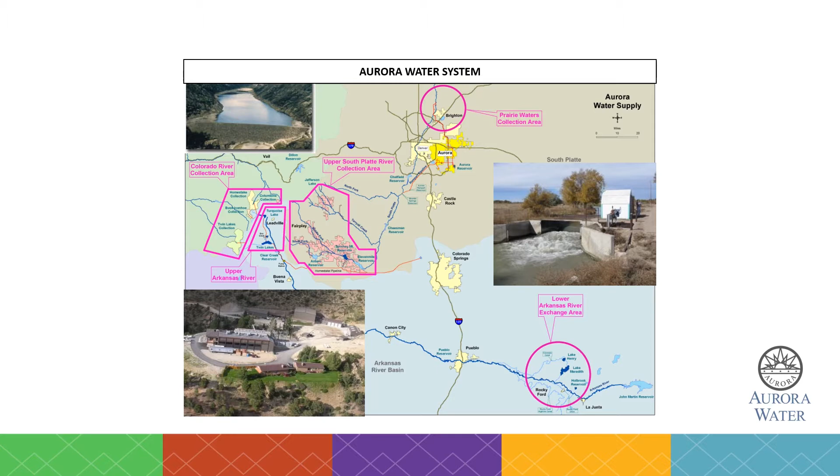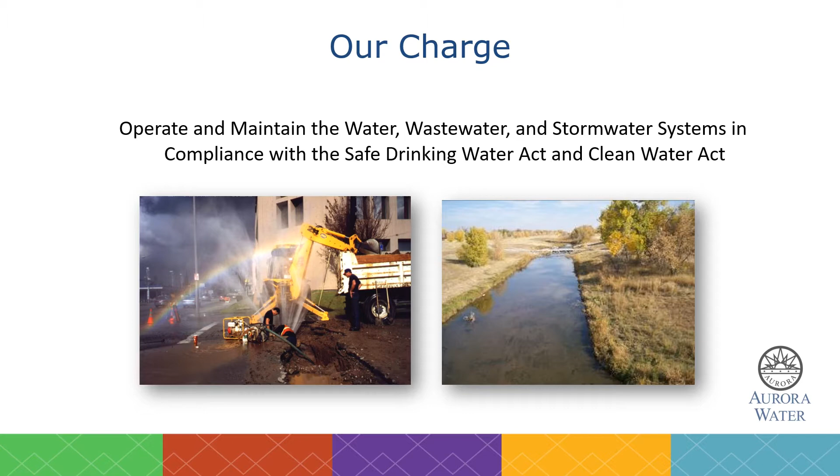So what is our charge? Aurora Water consists of water, wastewater, and stormwater systems, and we must maintain compliance with all state and federal regulatory guidelines for not only drinking water, but for wastewater and stormwater systems. Specifically, we must maintain compliance with the Safe Drinking Water Act and the Clean Water Act.

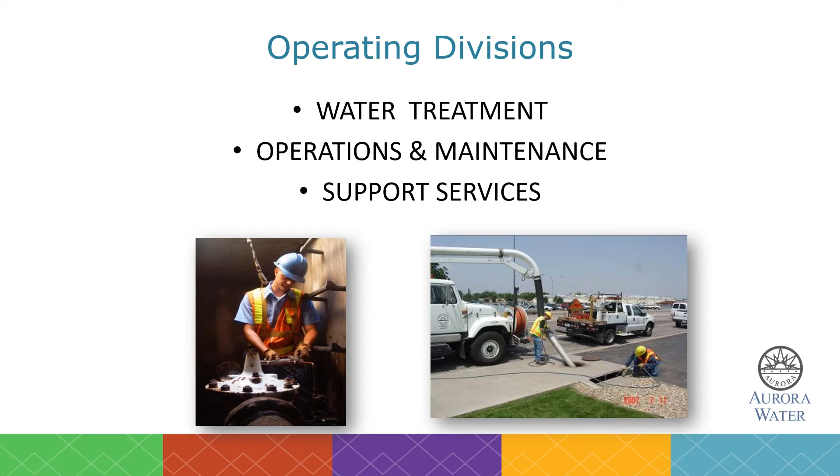Today, you'll be hearing from our 3 operations managers. The first up will be Bobby Aligo, who's the manager of water treatment, followed by Mike Mills, who's the manager of operations and maintenance, and lastly, Marina Lurch, who's the manager of support services.

Thank you, Mr. Sieben, and welcome everyone. My name is Bobby Aligo. I'm the manager of Aurora's Water Treatment Division. Water treatment has 2 sections: source of supply and water treatment.

Source of supply is made up of 4 groups. The first group is Spinney Mountain Operations, located in South Park, Colorado. The next group is North Campus Operations, which is part of the Prairie Waters Project and located in the area of Brighton, Colorado. The third group in source of supply is Reservoir Management, located here in Aurora. And the fourth group is Dam Safety, also located in Aurora.

Source of supply groups operate and maintain the city's raw water supply system, which is a network of reservoirs, streams, ditches, conveyance pipelines, and the water treatment facility at Front Range Airport, which is now known as Spaceport. I will share with you on the following slide more information on the city's raw water supply system.

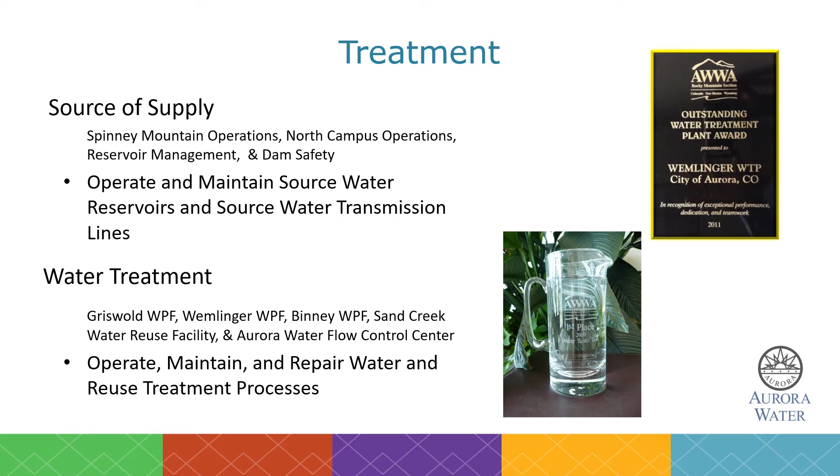Well water is pumped 34 miles to Binney Water Purification Facility through 3 pumping stations that pump water a total height of about 1,000 feet.

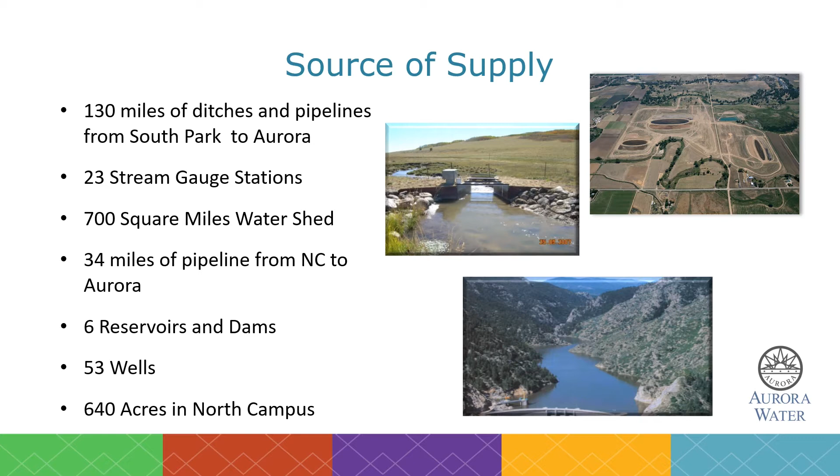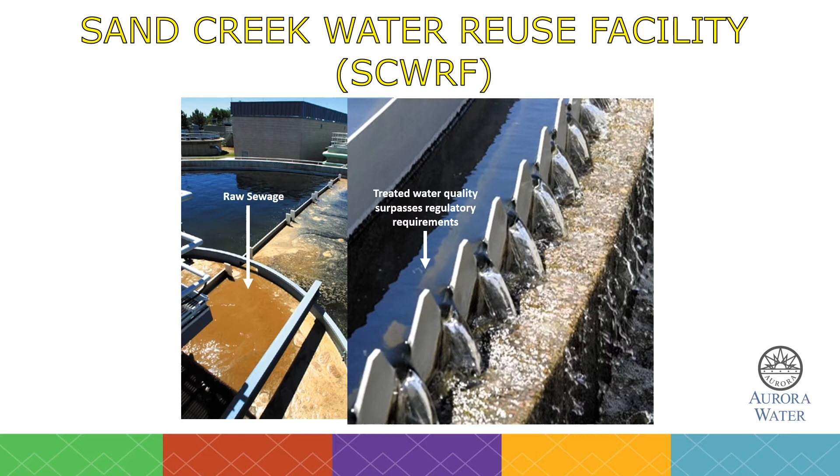Sand Creek Water Reuse Facility was placed in service in 1968 as one of Colorado's first reuse treatment facilities. The treatment plant has the capacity to produce up to 5 million gallons per day of treated water, which is pumped to Aurora's golf courses, parks, and green belts.

Sand Creek Water Reuse Facility was awarded the National Association of Clean Water Agencies Platinum Award for producing exceptional treated effluent and not having any water quality violations. Treatment plant operators and maintenance staff at Sand Creek Water Reuse Facility are responsible for this prestigious recognition.

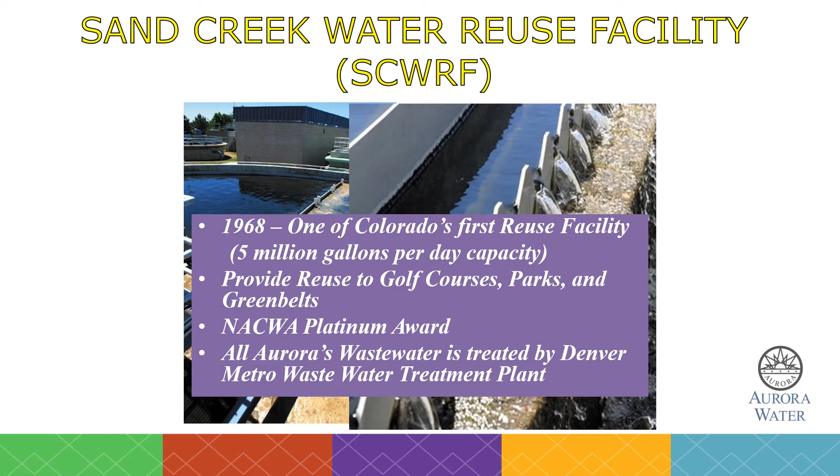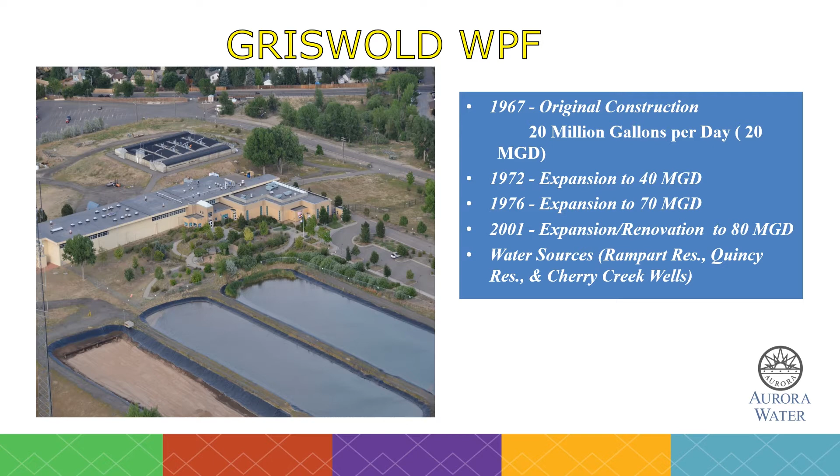Wemlinger Water Purification Facility is named after Charles Wimblinger, who was Aurora's Utilities Director from 1963 to 1968. It was placed in service in 1982 with a treatment capacity of 40 million gallons per day. It has been expanded twice, once in 1987 and most recently in 2002.

Wemlinger has a treatment capacity of 80 million gallons per day, and its primary source of raw water is from Rampart Reservoir and Aurora Reservoir.

Binney Water Purification Facility was completed in 2010 as part of the Prairie Waters System. The Binney facility is named after Peter D. Binney, Director of Aurora Water from 2002 to 2008. Binney Water Purification Facility has a treatment capacity of 50 million gallons per day.

This facility is really two water treatment facilities on one site. It has a conventional treatment train that treats water from Aurora Reservoir, and it has an advanced treatment train that treats water from the South Platte through North Campus. Binney Water Purification Facility treats water from Aurora Reservoir and our Prairie Waters Project North Campus wells.

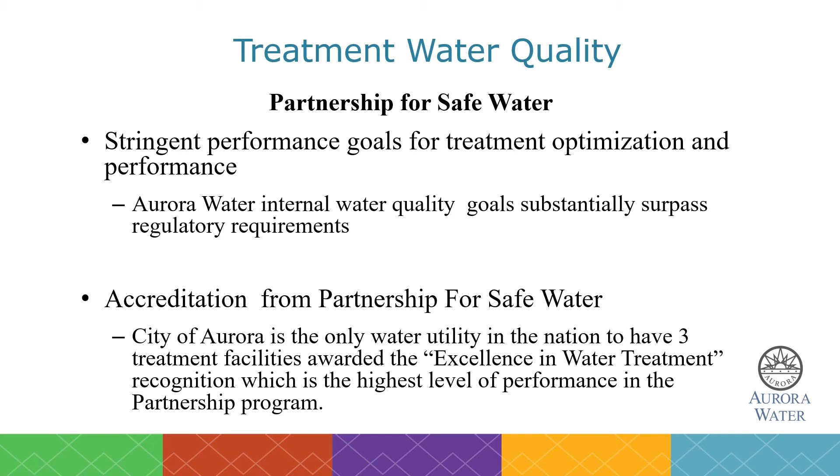As I mentioned earlier, the Aurora Water Flow Control Center is part of the Water Treatment Division. This group coordinates after-hour emergency response. They monitor alarms on SCADA and dispatch the appropriate group. SCADA is an acronym for Supervisory Control and Data Acquisition System. This group monitors Aurora's water system. They operate the water distribution system, operate Sand Creek Water Reuse Facility after hours under the direction of a certified operator, and they receive all after-hour customer calls.

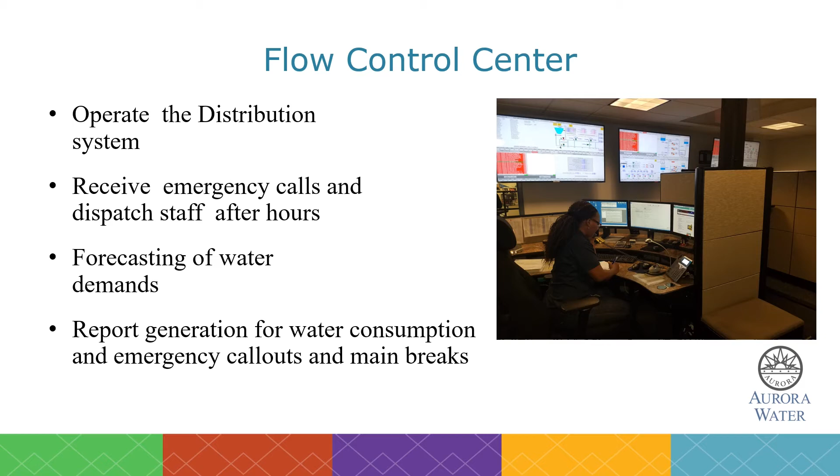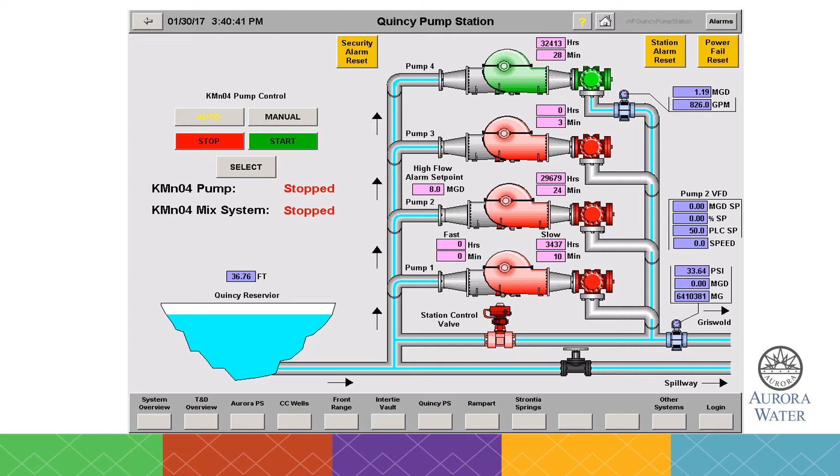Thank you, Bobby, and hello, everyone. My name is Mike Mills. I'm the Manager of Water Operations and Maintenance. Water Operations and Maintenance consists of 4 distinct sections: pumping, water T&D, which stands for water transmission and distribution, wastewater, and stormwater.

Let's talk a little bit about what each section does now. After the finished water has left the treatment facilities, water transmission and distribution and pumping are responsible for conveying that water throughout the distribution system. In water T&D in particular, they are responsible for operation, maintenance, and repair of the pipelines, as well as the appurtenances that are associated, such as hydrants, valves, and pressure regulating devices.

Pumping is also a large part of that. They're responsible for the operation, maintenance, and repair of the pumping stations, which maintain the flow throughout the distribution system, as well as the potable and raw water storage tanks. The pumping section also is responsible for sewer lift stations.

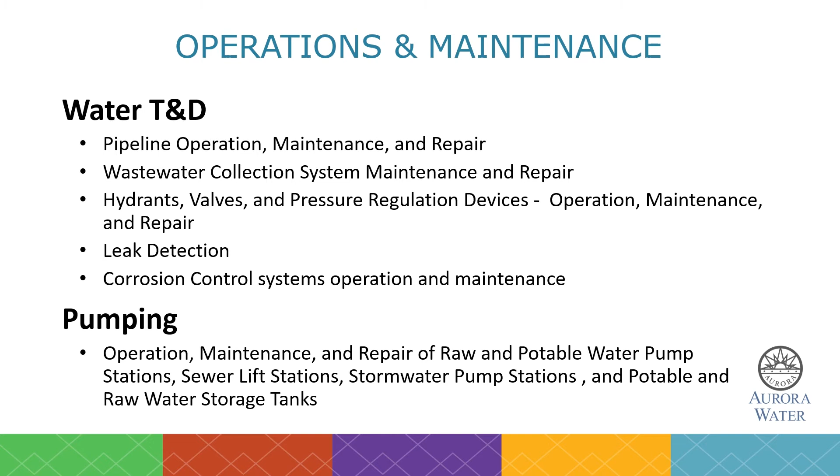The wastewater section is responsible for the operation and maintenance of our city's sanitary sewer collection system. They do this by cleaning and inspecting those pipes on a rotational basis. The stormwater section is responsible for the stormwater conveyance system, including maintenance of the items you see there.

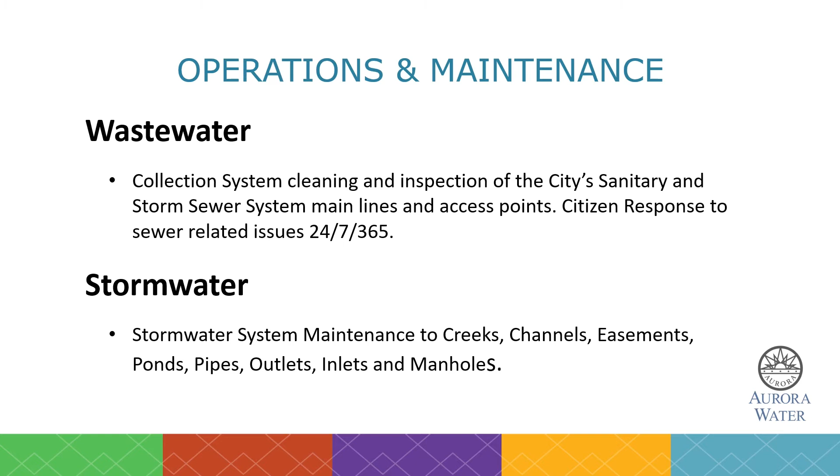Now let's delve into what each group does specifically. If you laid our water pipe end to end, it would stretch from here to Philadelphia, Pennsylvania, to give you some idea of the scale of the system. In it we have over 40,000 valves, which are maintained on a target of every 5 years.

An ISO fire rating is a score provided to fire departments and insurance companies by the Insurance Services Office. This score reflects how prepared a community and area is for fires. It mainly focuses on the local fire departments and water supply. For our portion of it, we maintain each one of our fire hydrants in the system annually to help achieve a high rating.

The pumping area has a multitude of stations that they take care of, including potable water pump stations, which maintain volume and pressures in parts of the city.

We maintain multiple raw water pump stations, including 3 along the Prairie Waters train. We even maintain reuse irrigation pump stations like the one used at the sports park. The pumping group is also responsible for maintaining potable water storage reservoirs, of which there are 9. Additionally, that group maintains 3 raw water storage forebays.

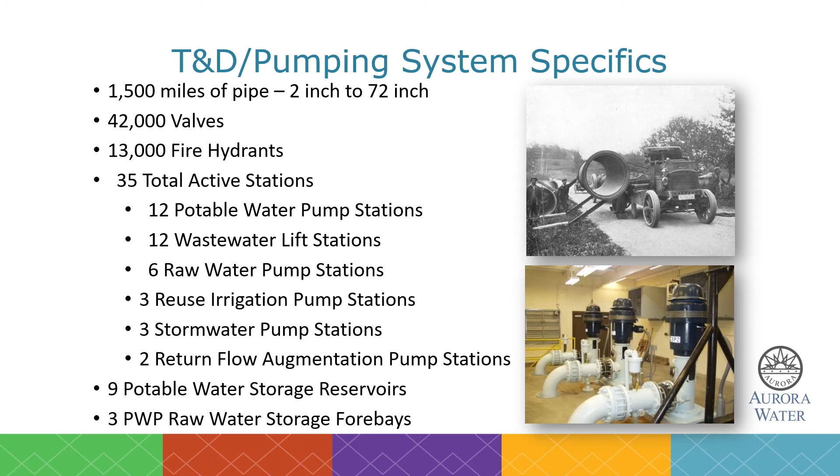In 2007, the Partnership for Safe Water and Water Research Foundation developed a project to help distribution systems optimize operations. It's modeled after the treatment program, and the membership in the distribution program ensures that water quality improvements can be measured and validated over time. Because of the work we've done here at Aurora Water in terms of distribution system optimization, we've been awarded the Phase 3 Distribution Directors Award.

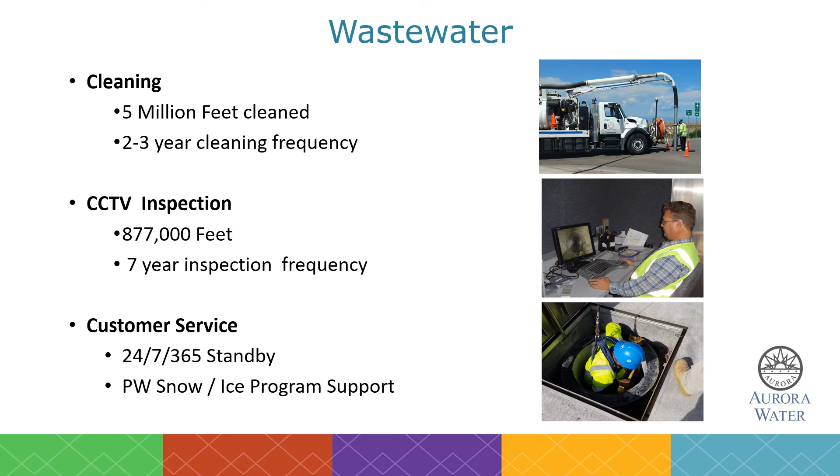And last but not least, this brings us to the stormwater section. The stormwater section is responsible for the cleaning and maintenance of the city's curb inlets, pipes, storm drains, and detention ponds. We maintain 88 miles of stormwater channels and creeks in removing sediment and vegetation from the channels, forebays, and ponds. We perform revegetation associated with channels and ponds. We maintain handrails and other fall protection devices for the public using stormwater facilities.

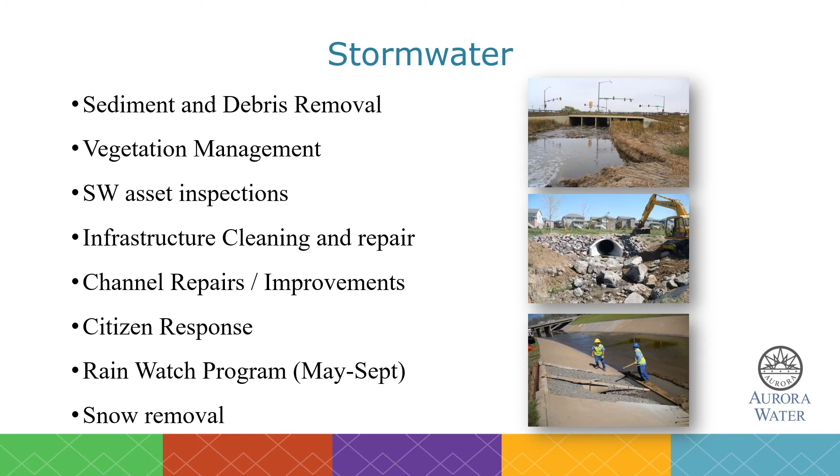We also provide flood response management, and we help out with the city's public works snow removal effort. Due to all of that maintenance work I just mentioned that Aurora performs on the stormwater system, including the fact that we do so in a proactive manner, we are able to be a part of discounting flood insurance rates and pass that on to our citizens.

The Community Rating System, or CRS, is a voluntary incentive program that recognizes and encourages community floodplain management practices that exceed the minimum requirements of the National Flood Insurance Program. Over 1,500 communities participate nationwide, and we're one of them. Now I'd like to toss it over to Marina Lurch, who is the Manager of Support Services.

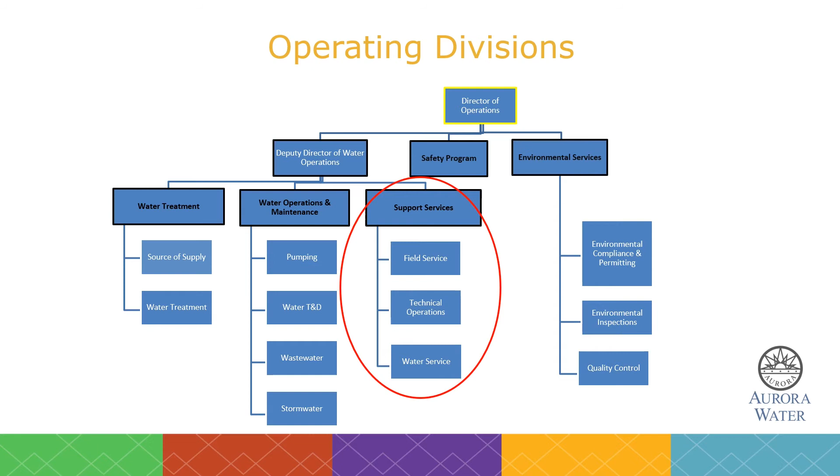Thanks, Mike. My name is Marina Lurch. I am the manager for the Support Services Division, and my area is comprised of 3 sections: Field Service, Technical Operations, and the Water Service section. I'll provide a little bit more detail to each of these 3 sections. Our Field Services team responds and resolves any customer concerns, as well as operate, maintain, and repair our meter reading system. Technical Operations team provides supervisory control and remote operation capabilities to manage Aurora Water's infrastructure.

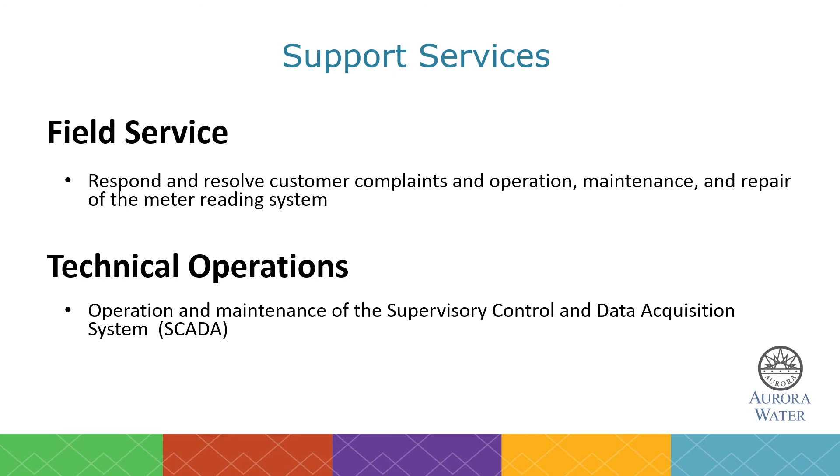And our Water Service team provides cross-connection control program, as well as utility locating for all of our water, wastewater, and stormwater infrastructure. They also test and disinfect new water lines and provide several internal services for Aurora Water. They take care of our fleet control program, as well as small equipment repairs. We also provide a trades team to allow for fixes in the system, and our warehousing and procurement team works on gathering any items necessary for the utilities to perform their work.

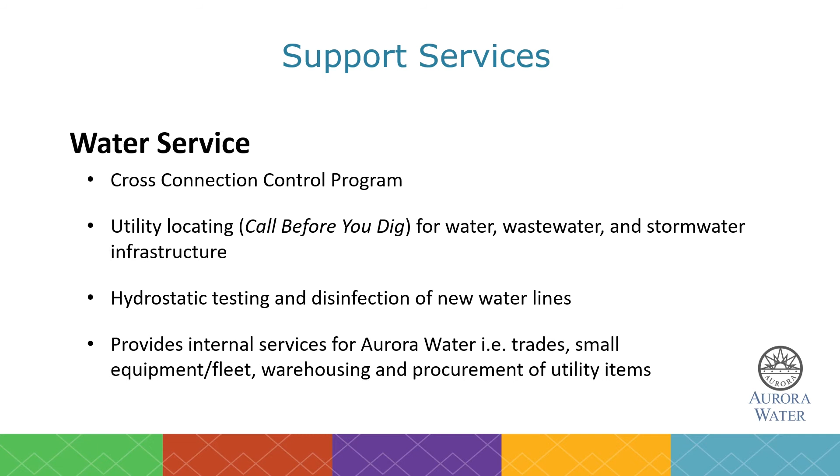Field service consists of 3 sections: meter maintenance, which manages our large meters, meter reading, and data management. Our meter reading and data management is a critical area to ensure accurate and timely billing to the citizens of Aurora. This team consists of meter reading, our Operations Service Center, hydrant meter rental, and data management.

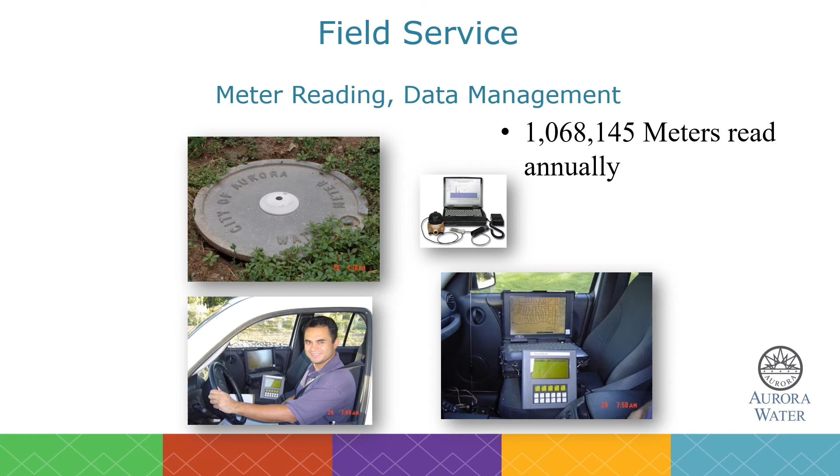Our Operations Service Center receives all Aurora Water operations calls, for example, customer service calls, as well as service requests from contractors. It is critical for scheduling, the creation of service requests, as well as work orders and the dispatching of appropriate field personnel. Other meter reading and data management responsibilities include quality assurance of all work orders generated and completed in our customer information system, fire hydrant meter permitting and rental, as well as subsequent billing related to those rentals.

Service response performs many functions in the field, including response to emergencies, water quality calls, scheduled appointments, final reads, and alternate water connections. This team converted to 100% mobile work just months before the pandemic hit. Very thankful for that. They're called out to identify noisy pipe concerns, leak identification, and a variety of other customer billing concerns.

SCADA team is responsible for the installation, maintenance, repair, and operation of various types of equipment and instruments that monitor and allow for adjustments to the water system. This team is also responsible for meeting the security requirements of the vulnerability assessment and has exposed all of us to new acronyms like I&C and my favorite, HMI.

SCADA is a network of intelligent devices that monitor and control the process for source of supply, treatment, transmission, and distribution of water services. It is also responsible for maintaining the SCADA system and provides skilled and technical support of devices to all of Aurora Water. Simply put, it is like the nervous system of our utility, with water being monitored throughout by our instrumentation and control.

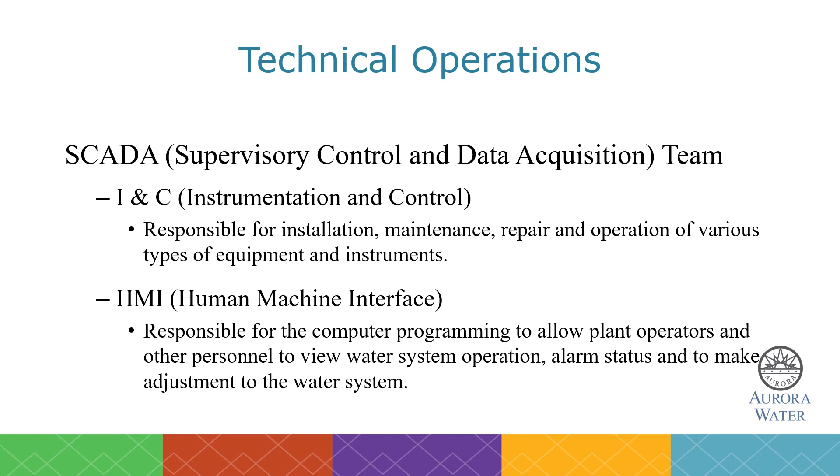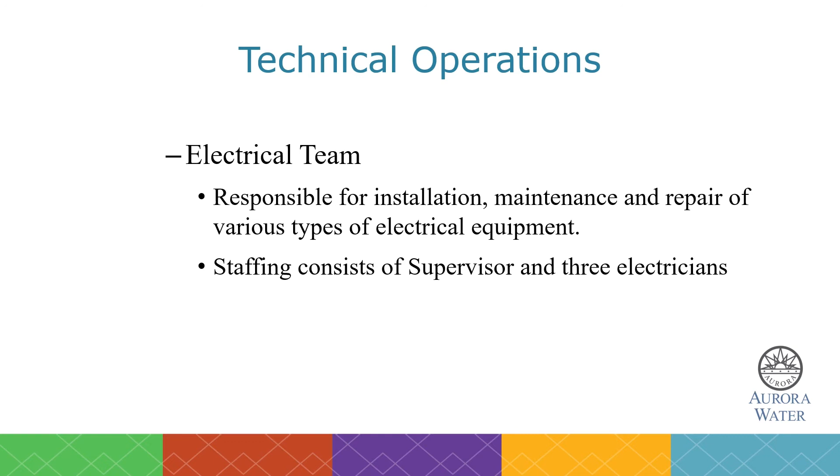Our water services team is comprised of our warehouse, our trades team, cross-connection control, as well as fleet and small equipment, utility locating, and contractor services. In November 2019, we transitioned to Tier 1 requirements for utility locating. That was a couple of months prior to the January 1st, 2020 deadline. We wanted to ensure quality could be maintained and that there were no problems prior to the deadline, and we effectively changed over prior to the deadline date of January 1, 2020.

Just to give you an idea of how many utility tickets we take per year, we were just over 65,000 tickets in 2020, which is at least about 6,000 more than the prior year. So that's definitely made an impact on our utility locating team. As you can see, support services is a very versatile and wide variety of job descriptions as well as job responsibilities. We appreciate your time and certainly have time for any questions.

Hi, my name is Sean Leesky, and I am the Environmental Services Manager for the Aurora Water Department. And I'm here to talk to you a little bit about what my group does. As you can see here in this org chart, we had been under a Director of Operations. Unfortunately, we recently had a retirement from that position. That position has not been filled, so on an interim basis, I am currently reporting to the Deputy Director of Water Resources.

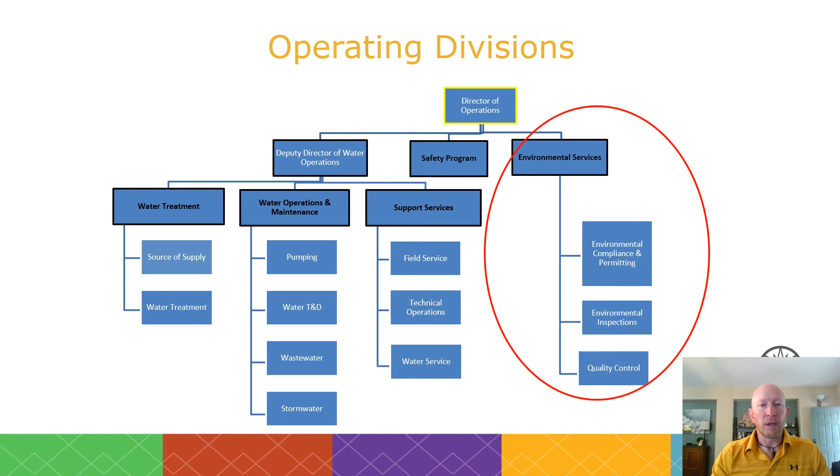We are comprised of 3 groups: the Environmental Compliance and Permitting Group, the Environmental Inspections Group, and the Water Quality Control Laboratory. I will be getting into more detail on the next several slides on each of those 3 groups. To start off, though, I wanted to give you a little bit of general background on each of the 3 groups, and we will take a deeper dive into what each of these groups does in the corresponding slides.

Environmental inspections, as you can see here, their primary role is conducting inspections to ensure compliance with various state permitting requirements, with some pretreatment requirements, and they also respond to spills and other incidents that have the potential to impact our storm sewer system.

Our compliance and permitting group is there to ensure that we maintain compliance with all federal, state, and local environmental regulatory requirements, and that is no small task, mind you. There are a myriad of rules and regs, and again, we'll get into that here in a little bit. They obtain and manage all environmental permits, and they conduct some internal reviews to ensure adherence to those rules and regulations, and in some cases, internal operating procedures.

And last but not least, our Water Quality Control Laboratory. They are a critical component of our system. They conduct our regulatory and operational water quality sampling. Many of the rules require sampling. They manage our water quality of storage reservoirs, and they assist our operations with optimization processes. That's a critical role that really helps our operational groups and our treatment group that you may have heard about earlier to understand their treatment and how things are working within the system.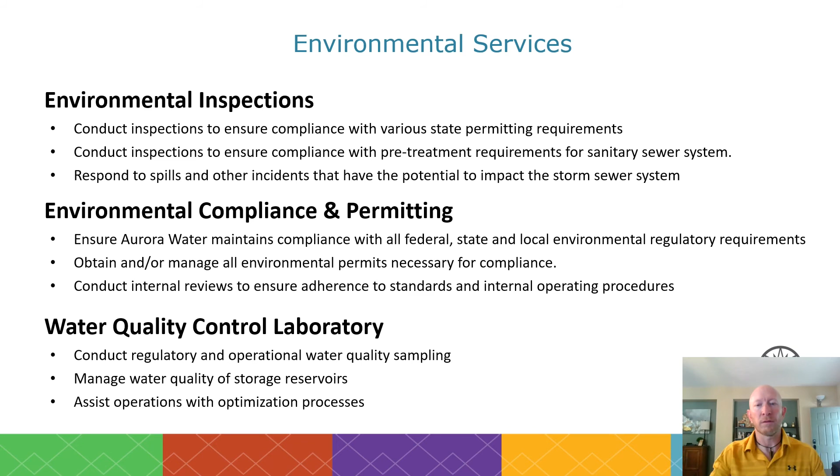And grease interceptors are very similar. And they're both in place to ensure that we prevent certain materials from getting into our sanitary sewer that can cause backups and problems in the system, those being sand and grease. And so sand traps are typically associated with automotive shops and various types of retail places like that. Our grease interceptors are typically associated with restaurants, and they are places that produce high amounts of grease. And again, it's to prevent those materials from getting into our system, where they can kind of conglomerate, cause big problems, and then eventual backups.

The other things they do is channel and pond inspections, and those inspections are to basically evaluate our stormwater infrastructure and our channels and ponds to make sure that there's no sediment buildup, there's no blockages, there's no material built up in the channels, such that if there were a big storm event, that we might get backups, again, flooding problems associated with that. So another type of backup, but more associated with flooding. They also do some public and private stormwater ponds, similar, to be sure that those are being maintained in accordance with the standards and what they were designed to do.

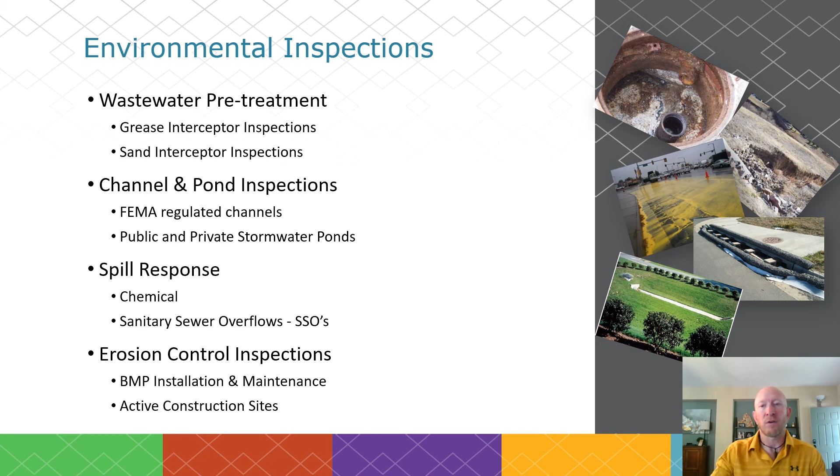Our compliance and permitting group really has no small task for the organization. Kind of going to start a little bit up at the top and go down, but one of the couple of things they do is some internal reviews. These are what we call mock sanitary surveys, or audits, for lack of a better term. Sometimes we don't like to use that term because it carries a negative connotation. But really what we're there to do is evaluate ourselves, ensure that we're following SOPs, and ensure that we're following the rules and regs. There's a lot of rules and regs out there. There's a lot of things to remember. And so this is just an internal process to evaluate and continually improve.

So in some cases, it may be that they are perfectly in compliance with the rules, but there's some areas where we might be able to improve. So we're doing some of that just to ensure that we are maintaining compliance. We review regulations as they come out, and so we kind of call those regulatory reviews. The federal government, as well as the state health department or environmental department, is constantly looking at changing rules and regs. And so this group evaluates those, understands how they are going to affect our utility, and then works with our operations groups or other groups to ensure that they understand how it's going to impact them once that rule becomes effective. And that kind of ties into the compliance assistance.

So working with our operations groups, working with our engineering groups, working with others just to ensure that they understand those rules and exactly what it is they need to do to comply. They also participate in a large variety of stakeholder meetings.

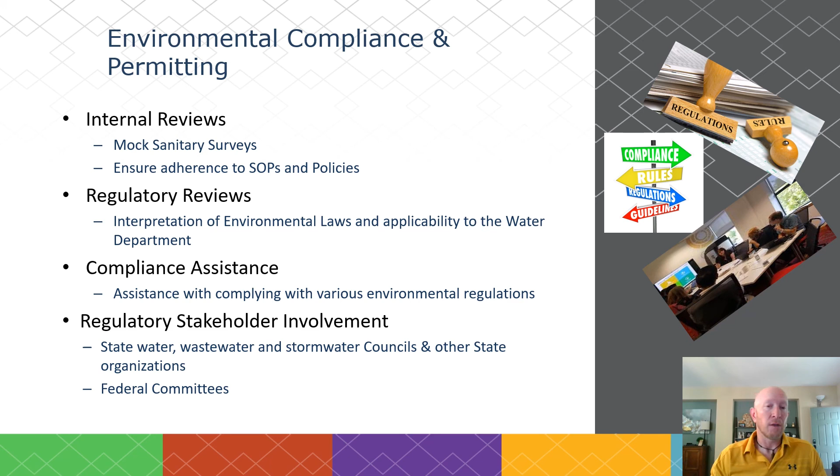And so the federal government, when they are developing rules, same thing with the state, they will have stakeholder meetings, and this group will participate in those, again, to understand what's going to be coming down the pipe and to make sure that we are having a voice at the table when those things are being developed.

A couple of the other things that they do, more associated with permitting. We do manage all of our permits for the city. So we have a municipal separate storm sewer permit or stormwater permit. They manage that. They manage any 404 permits that we might get. So they do manage a lot of permitting.

In addition to that, we have our household chemical roundup. We have a couple of events that we manage. That's an annual event that's held typically in September. Unfortunately, the last couple years, we have had to cancel that due to COVID. But we also manage what we call a door-to-door household chemical waste program, where we have worked with an organization that will drop off essentially a container. The household fills that container up, and then they will come and pick that up for a nominal fee.

We also do the Highline Canal cleanup. It's an annual event held in the spring. In years past, that's primarily been held in March. This year, we decided to move that up to April in an effort to try to get a little bit more predictable weather, and it was very successful. So we will likely be holding that in April in the future. But we clean up trash and debris and things that are cluttering the canal to, again, make sure it's flowing and not impacted.

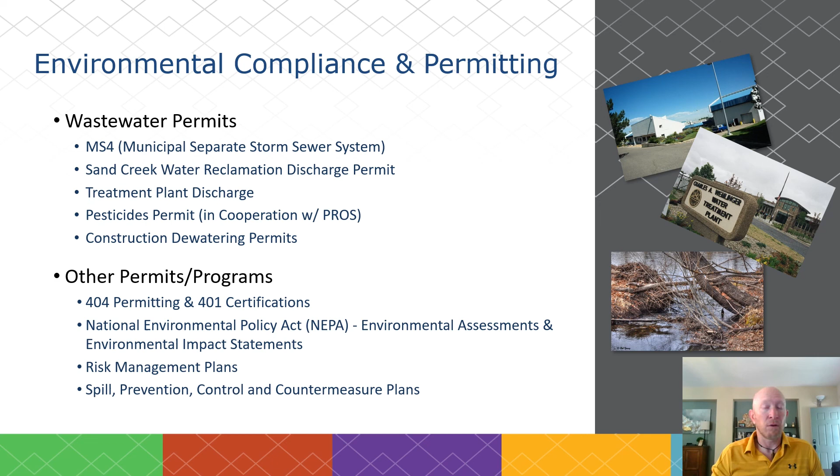And last but not least, I kind of mentioned a few of these. We deal with wastewater permits and a variety of different permits, both federally and at the state level. And so we assist our engineering group, our water resources group, and even our operations group with obtaining these permits when they are necessary.

And going on to our quality control laboratory, they are a state certified laboratory. They, again, conduct all of the regulatory analyses for our drinking water, wastewater, and stormwater system. And so there are a large number of regulatory monitoring requirements that are required by all those rules. And our quality control laboratory ensures that we are in compliance with those, and we're taking all those samples and providing reports to the appropriate regulatory agency.

We do comprehensive source water analysis and reporting, so they also do an evaluation of our source waters to ensure that they continue to be treatable by our treatment division. They provide that information to the treatment division, and decisions are made based off of that on where and how to pull water. And so it's a very critical role that they play in the assistance that they provide to our treatment division.